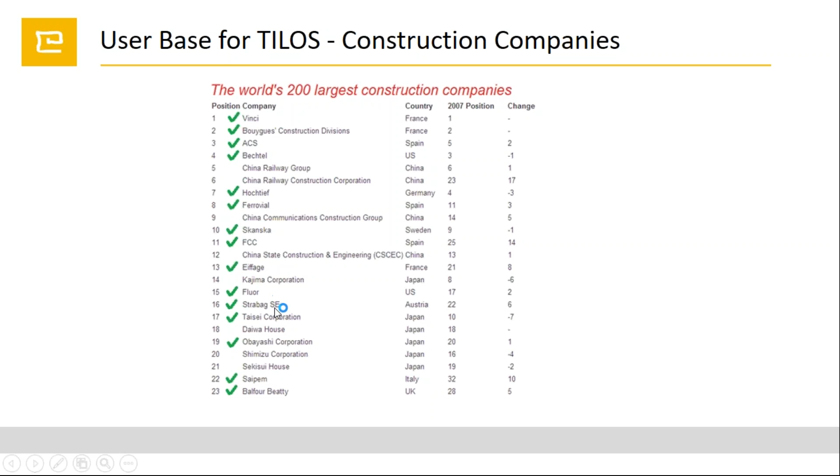So as you can see, TILOS is the market leader in scheduling software in construction. To prove this, here I have the list of the biggest construction companies in the world. These highlighted in green are using TILOS in their projects. Companies like Vinci, ACS, Hochtief, Skanska, Strabag, Obayashi, they all use TILOS.

Let's speak a little about linear project characteristics. So in which industry can we use TILOS? Well, in industries like pipeline, railway projects, highway, tunneling, metro projects, engineering, and transmission.

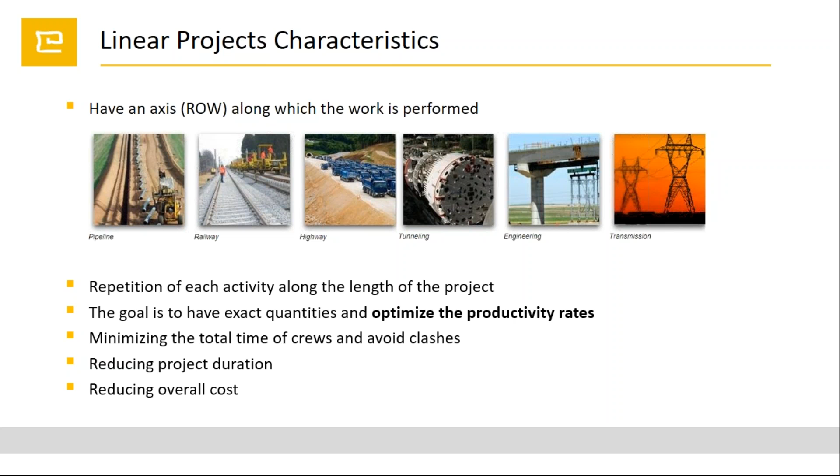Here I have some sample reports which were made in TILOS. Please pay attention that all of these samples are real live projects which were performed and scheduled in TILOS. For example, here we have the highway road project from Norway. Also here we have the transmission line project, pipeline project, high-rise building project, metro tunnel project, and railway project.

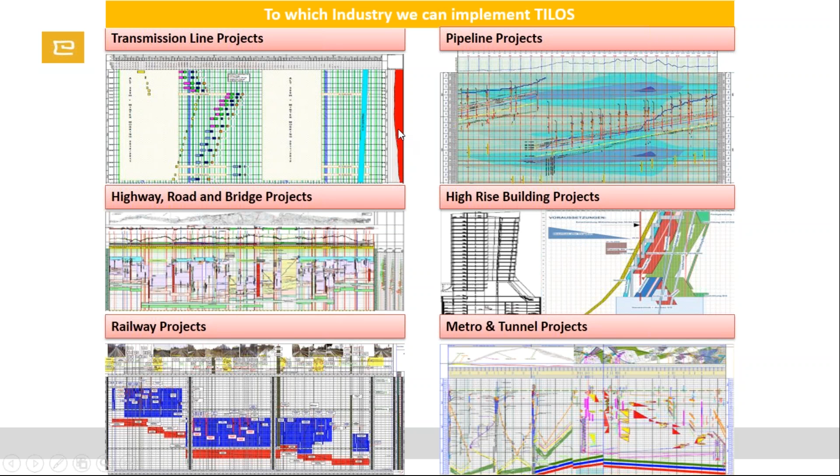So what is the biggest advantage of using TILOS? Well, in my opinion, the biggest advantage of using TILOS is that everything we can see in one big picture. All activities, all the most important information, we can see in one single page.

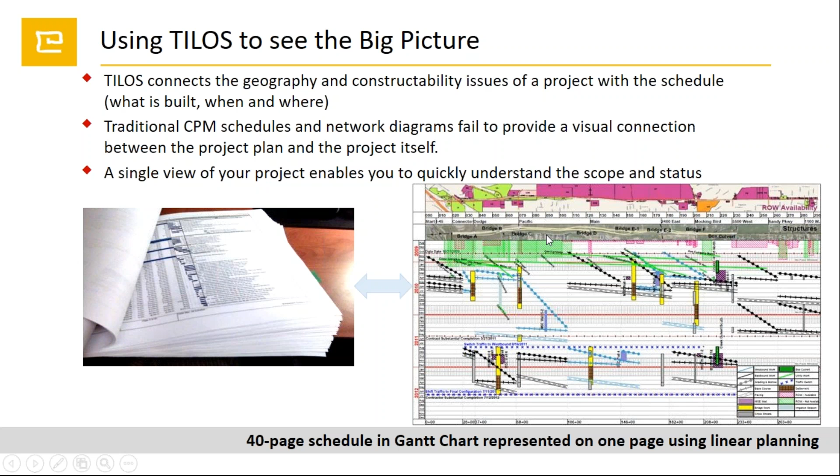For example, here we have this one project. This is the same project, but here we have a 40-page schedule in a traditional Gantt chart on the left side, and on the right side we have the same project but in TILOS. Every activity you can see on one page, and according to the geographical object axis information, you can know exactly when and where any activity takes place.

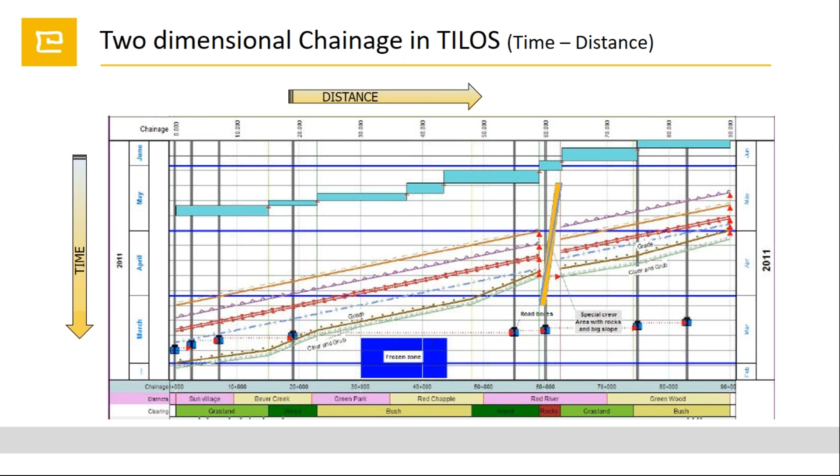TILOS upgrades this to 2 dimensions. So here on the left side we have the vertical axis of time, but horizontally we have another axis which is distance. So here we have our main work area and all activities we can see according to these 2 axes. By the way, the name TILOS is an acronym of the words time, location, solution. Okay, later on I will tell you how you can read this.

Okay, so now let's talk about how exactly TILOS works. Here we have our main work area. This is a simple project which, as you can see, is 4 kilometers, and it's going through 3 months from August to October. So to explain how TILOS works exactly, you must...

I'm using a simple allegory. Try to imagine TILOS as a single page of paper where you can draw anything you need in a project. You can draw any activities from the point you want to the point you need to go. Also, you can divide this page into smaller pages, smaller cells, and in all cells you can put different properties, different stuff. So, for example, you can integrate TILOS with graphical objects. Here we have a simple graphical visualization of the road project.

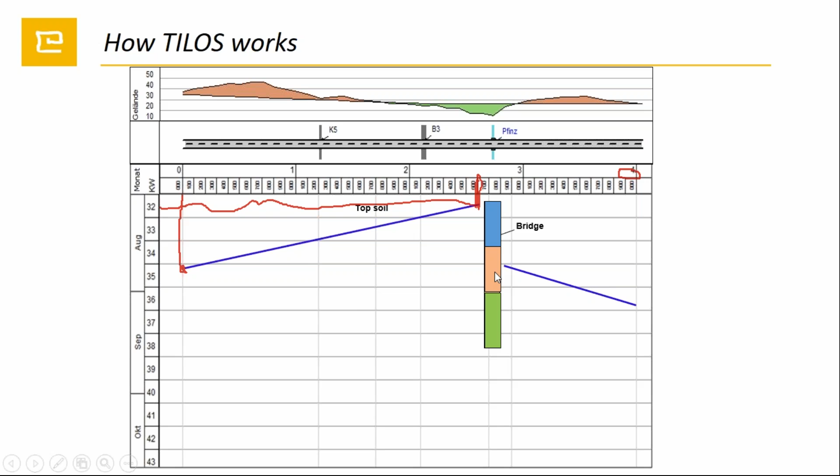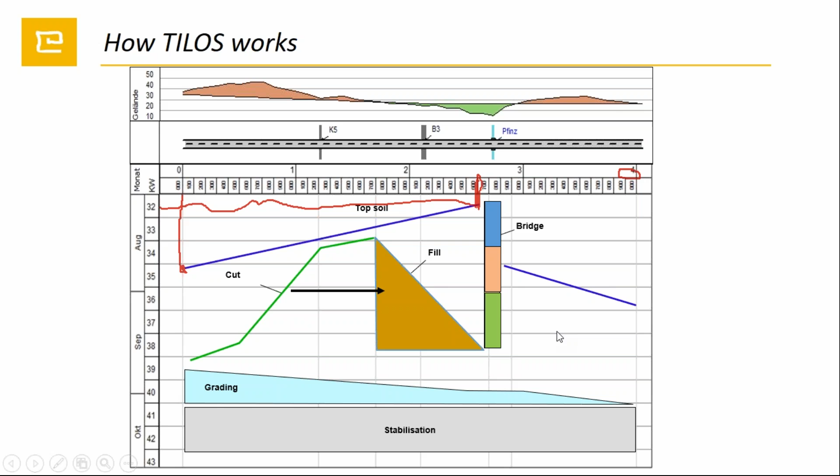As I told you, we can put here some other different shapes - here we have grading, stabilization. Okay, let's move further.

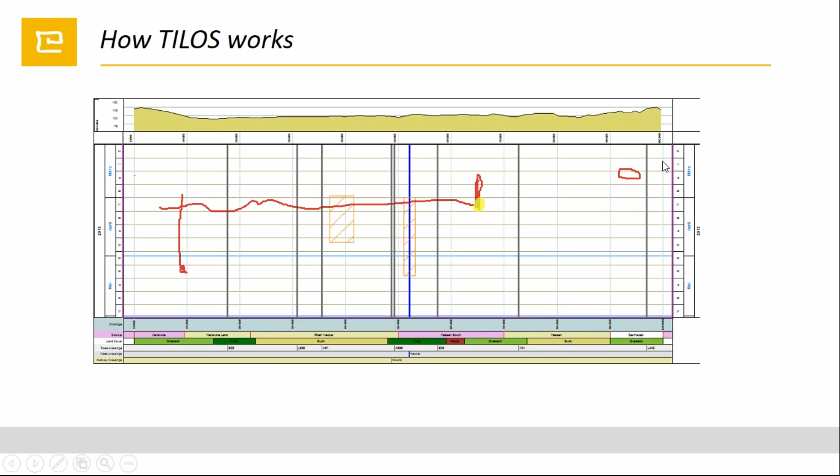Okay, here we have another work area. Up on top we have the elevation profile, and we have our axes, distance and time. But please pay attention to this rectangle in the middle of our work area.

This symbolizes for us that this is a restricted area. What does this mean? It means that in this place, during this time, which is April, we cannot perform any other works - let's say because of environmental reasons. In April we have bird migration here, so we cannot perform any work in this place - it's restricted for us. Okay, let's put here some activity.

Okay, so we have here an activity which we want to start in March, and going down through this line, we can see that we have a clash where we violate our restricted area. So what can we do in this case? Well, for example, we can go to our restricted area and stop in this place before we violate our restricted area.

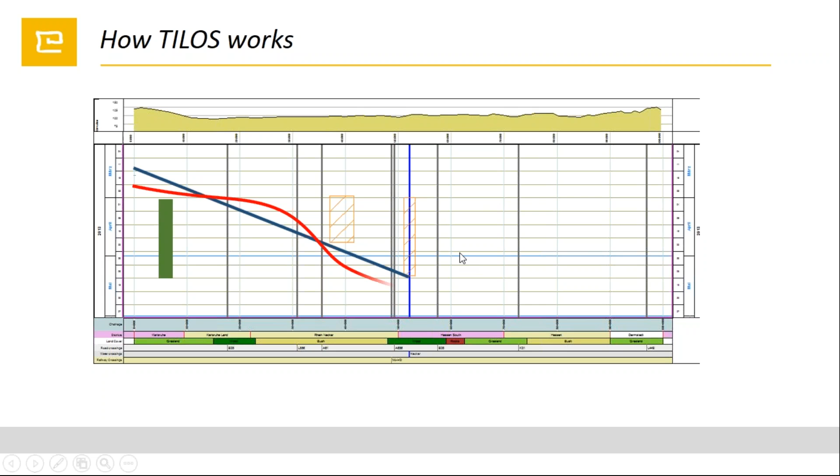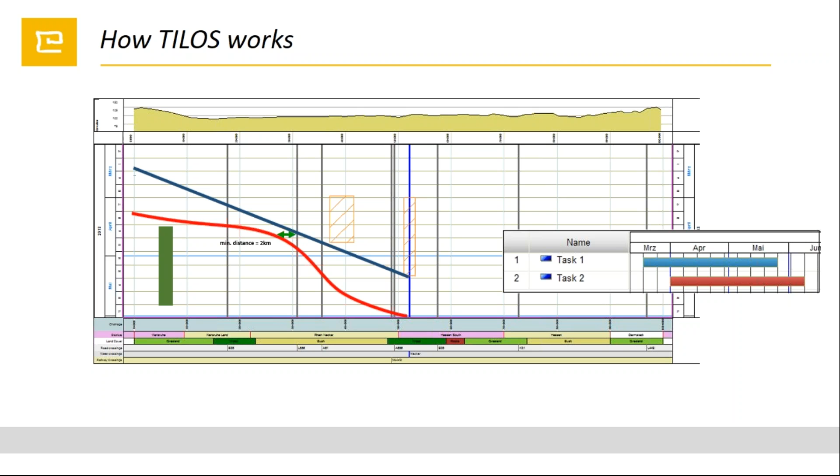So what can we do in this case? Well, we can do the same as last time, moving one task 1 week later, but TILOS also gives us another option. For example, we can set here the lag distance between our crews. Let's say we want our crews to work with a safe distance of 2 kilometers from one to another. In this way, both teams can work without interrupting one another.

Okay, let's speak a little about resource and cost planning. TILOS already has in its library some defined resources which are divided into different categories, like labor resource, machines, materials, etc. And all these resources are ready to use from the TILOS library, and all these resources we can put to our task.

And in TILOS we have permanent resource, consumable resource. You already know what these mean, so I will not take your time to explain this. But some new option which TILOS gives us is the mixed resource. What is the mixed resource?

Well, let's say that you have a subcontractor on your project, which gives you their own equipment with operators and their own fuel. And let's say, because it's a subcontractor, we count this team of men, machines, and material as one resource team. This is the mixed resource. So we simply put a few resources together as one value for us.

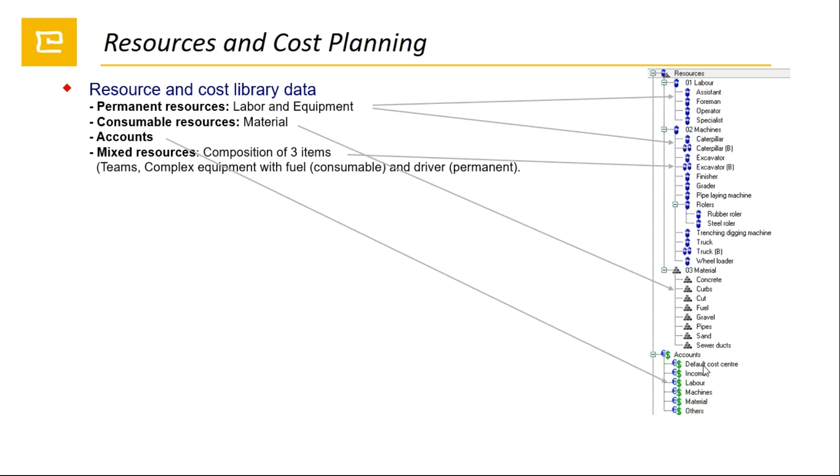Also we have the accounts, which are simply our cost centers. Okay, let's now go to analyzing the resources.

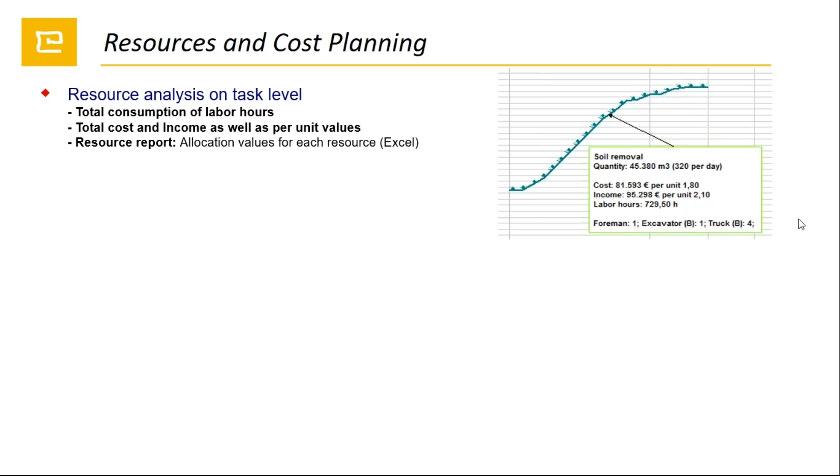You can also show this on the distance axis, so you can see, for example, how much equipment you use in every kilometer, in every section, etc. Also, all this value, all resources, you can visualize as a histogram or diagram. The same with cost and income, you can show this in a diagram, so you can see our values with a graphical bar: total cost, total income, machines, labor, time working, hours working.

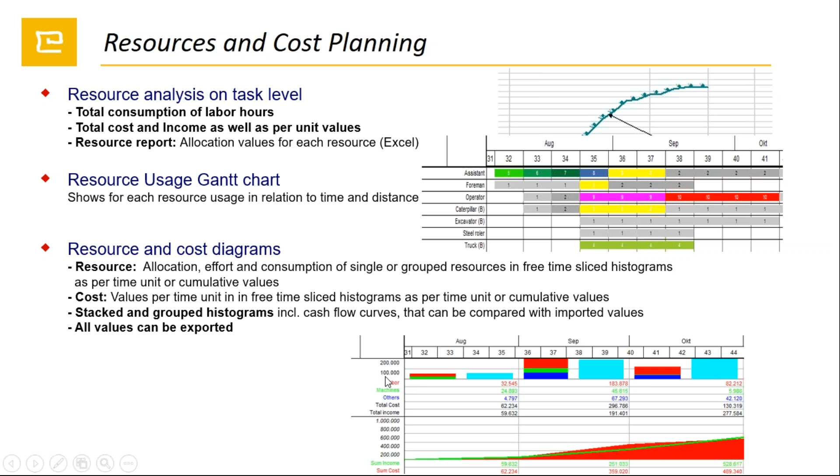Now let's talk a little about putting progress in TILOS and using the baseline. In TILOS we can create and store an unlimited number of baselines, which provide us information on our planned days, labor hours, total cost, income, etc. And we can put progress in TILOS by percent done, or quantity done, or distance to which we complete our activity.

So now, for example, here on the right side we have a simple project with a few activities. This blue horizontal line is our report date. Okay, so now let's put here some progress.

Okay, so we put here our progress. This green line is the completed work. Everything below our report day is work which we need to perform in the future. Let's go further.

We add here some more progress also to our culvert, and we can display our baseline. This gray line is our baseline. So analyzing our actual progress against our baseline, we can exactly see how much we are delayed with our plans.

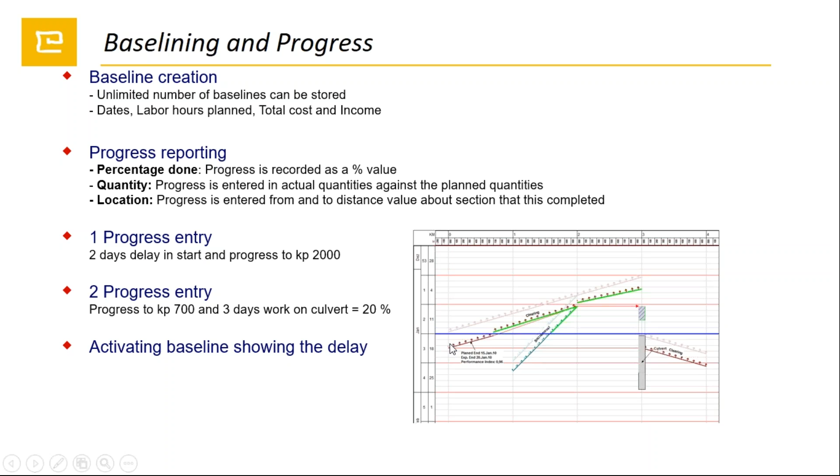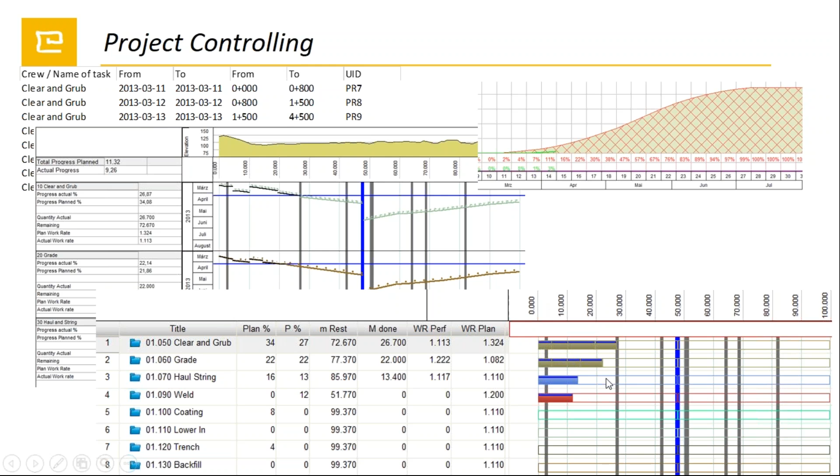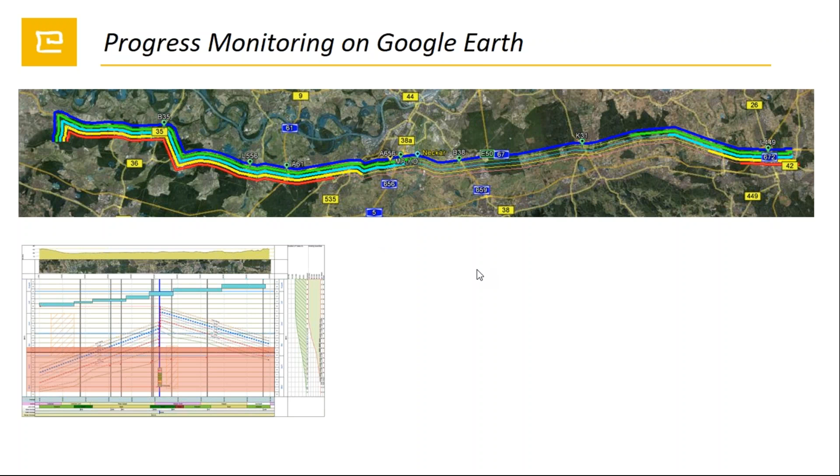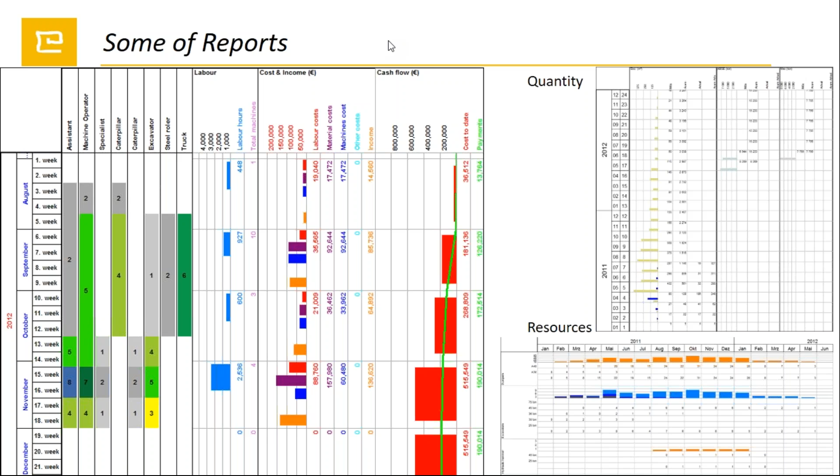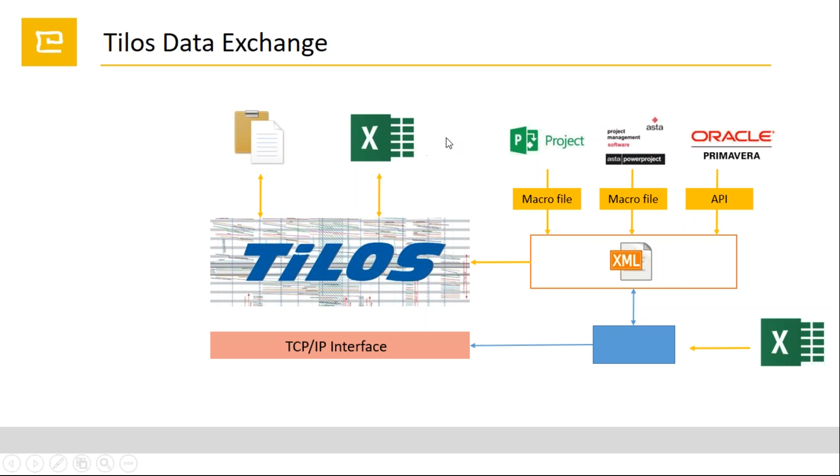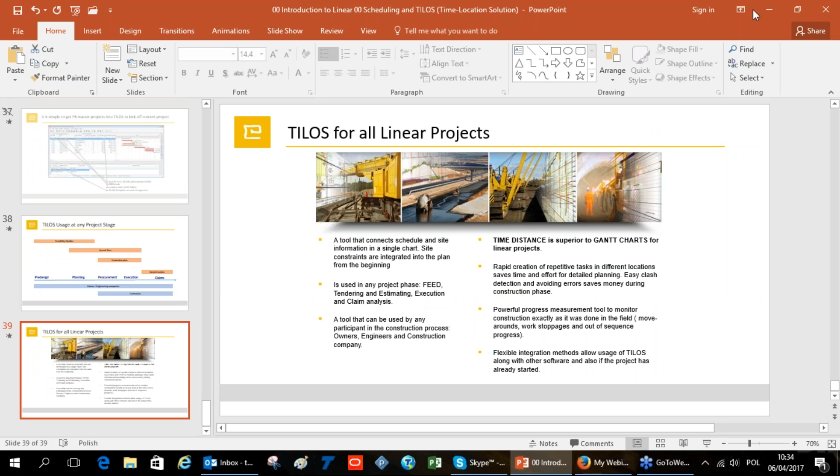So this is everything about the presentation. Now I want to show you a real life example of using TILOS. I prepared some projects on which we use TILOS.

Okay, so for the beginning, here we have the Western High-Speed Diameter project from Russia. Let me make the screen a little bigger. Okay.

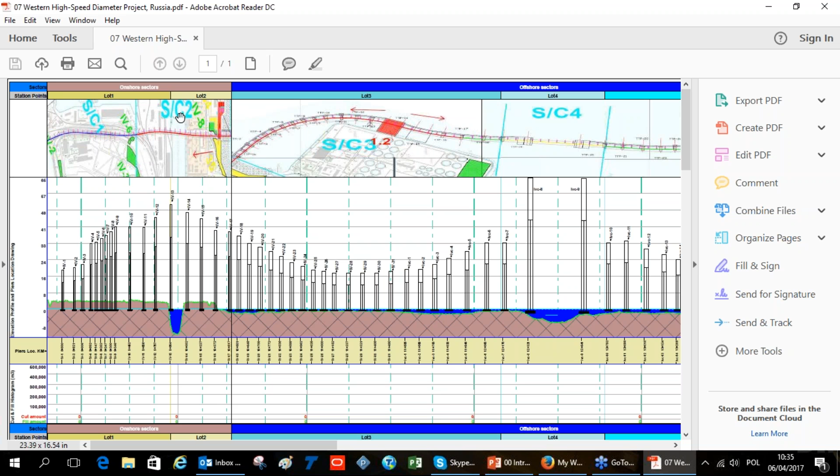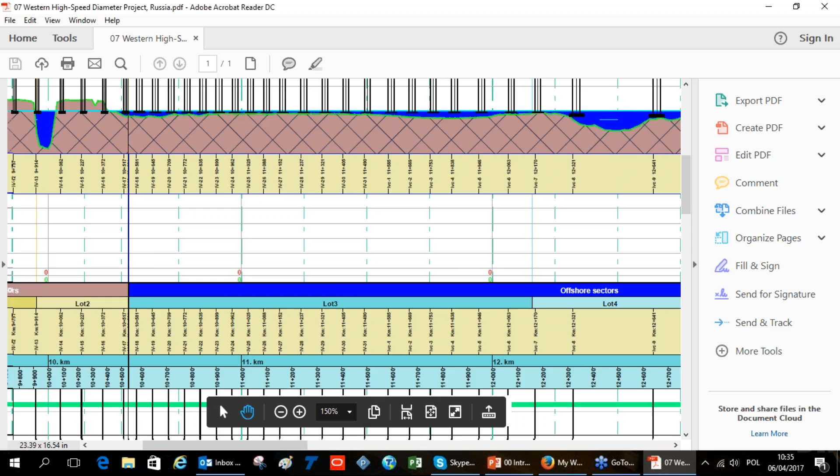So here you can see some graphical information. Here we have divided the project by sector, station point. Here we have some elevation - everything bigger. Elevation profile with piers location drawing. Also, we have here the cut and fill histogram, some kilometrage. Here we have design work until this moment, some station work.

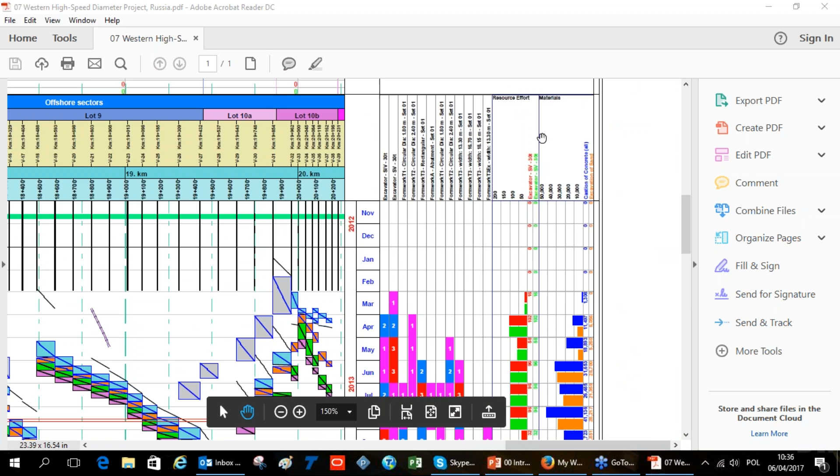Also on the right side we have reports. Here we have equipment, some resource effort materials.

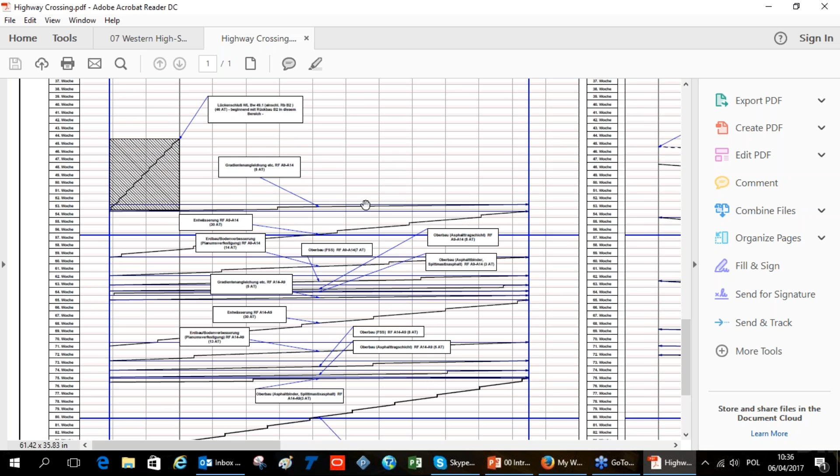Now I will show you the project of the highway crossing. This is a project from Germany. So as you can see, this is quite different from the previous one - it has fewer cosmetic options. This was the wish of the clients, for it to look like this. Our activity has a name, using a text field.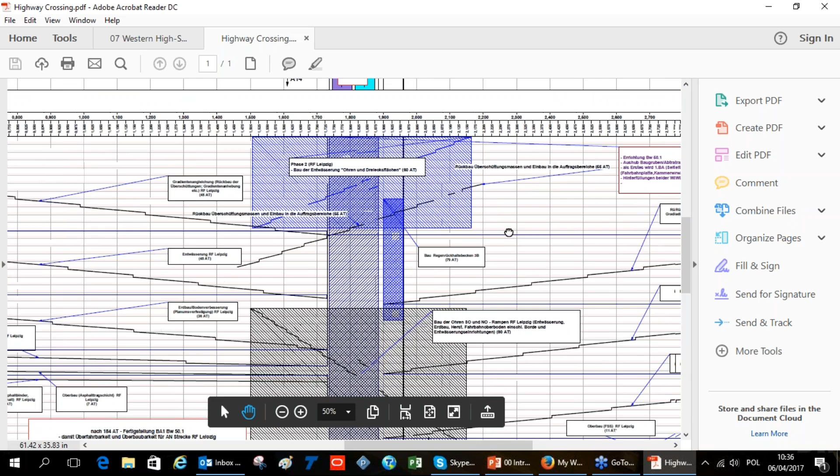And as the last, I will show you the highway project from Norway. As you can already see, it's much more complicated than the previous one.

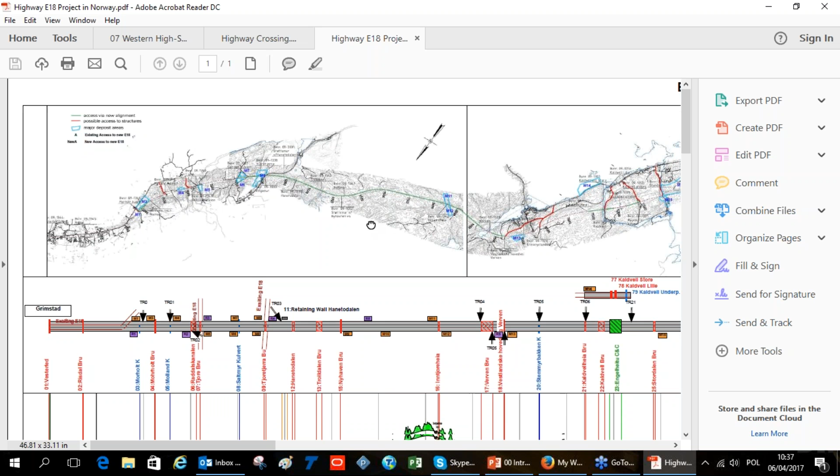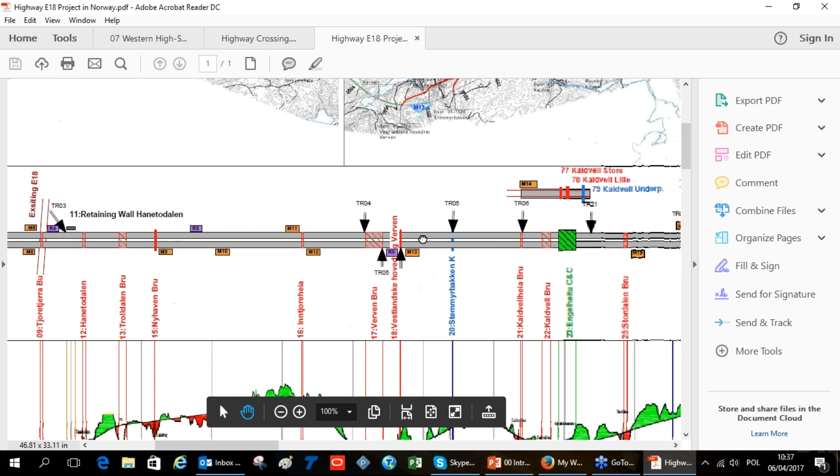On the top we have the map with the important location points, which was implemented in TILOS. Below we have the graphical visualization of our highway, and please pay attention that all of this

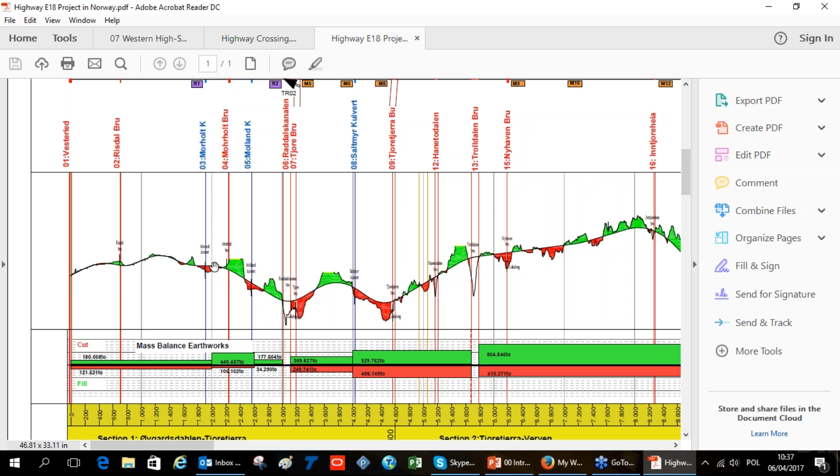visualization is made completely in TILOS by using only the TILOS graphical library. Below we have our cut and fill with our road level and cut and fill soil. Also here we have

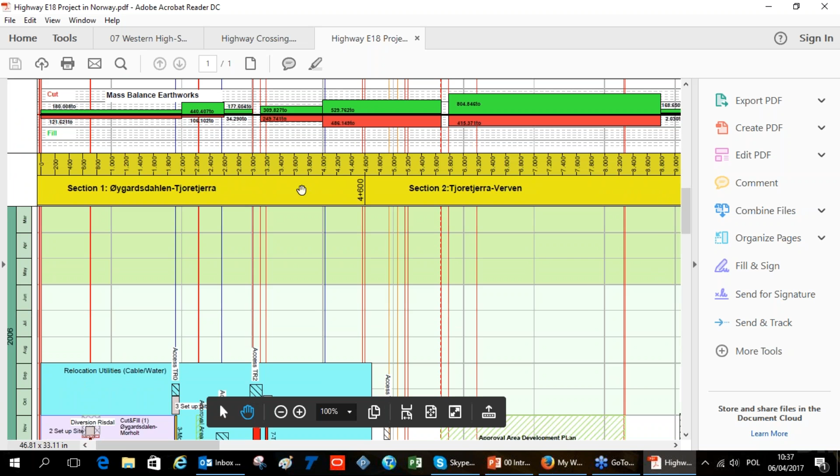our mass balance work. Here you can see that the project is divided by section. Here we have activities.

It could look complicated, but later when we work more on TILOS and you learn to read this diagram, it will not be very complicated.

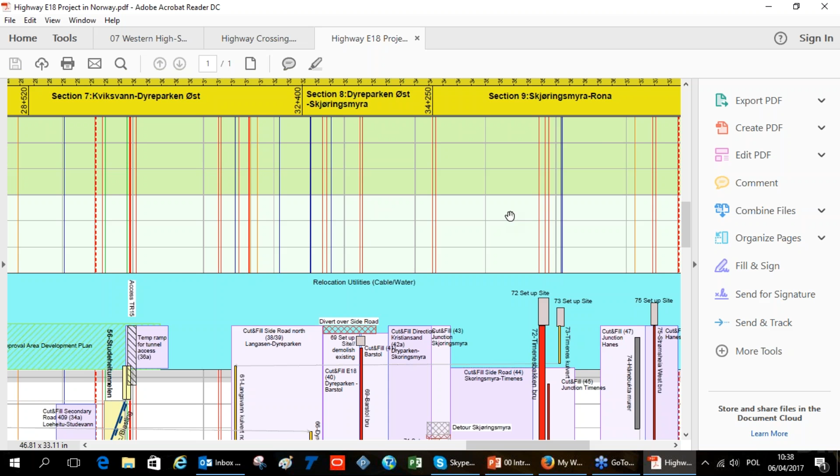Also, as I told you, the project is divided into sections, and you can show each section singularly. Not only the whole project, but you can see the view of a single section. I will later show you how you can change this.

And also here we have some reports: earthworks, tunnel sidewall elements, tunnel roof elements.

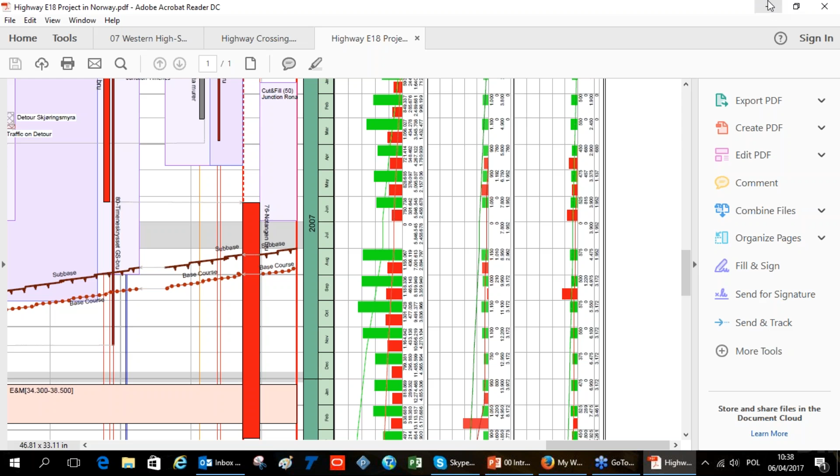So now let me go to a live demonstration. I will show you some options for how we can create a new project in TILOS.

So this is the first site which we will see in TILOS. I'm clicking File, clicking on New.

Here we can choose the templates on which we will work. Templates are very useful for us, which help us save time, because all templates already have a predefined library

with objects, with task templates, etc. All these templates we can adjust to our needs. We can change this, or we can create completely new templates from scratch. For now, I will choose the general template.

Okay, here we have our settings for our project. I will call this the webinar project.

So we can choose the distance unit, start and end distance. I will make this a little smaller. Let's say that our project will have 4 kilometers, 4,000 meters.

Here we can choose start and end date. Also, the base time unit by default is the 8-hour working day. Also, we can choose calendars. All calendars we can change, or we can create a completely new calendar.

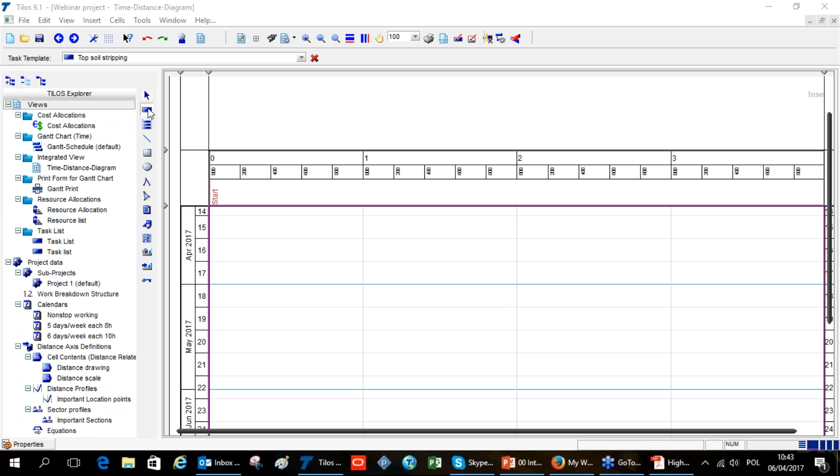And here from the quick menu, we can choose which template we want to use. For example, I want to use topsoil stripping.

Also, all of this I can take from the TILOS library. Here I have task library and task templates. But okay, I will now use this, I will add topsoil stripping to our activity.

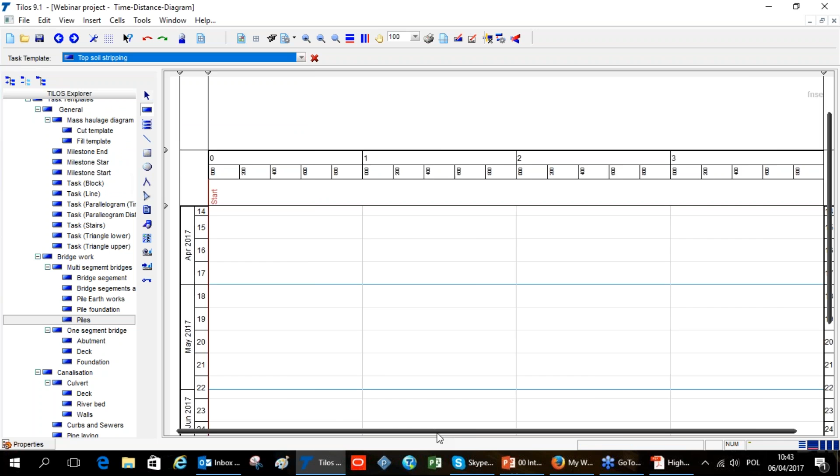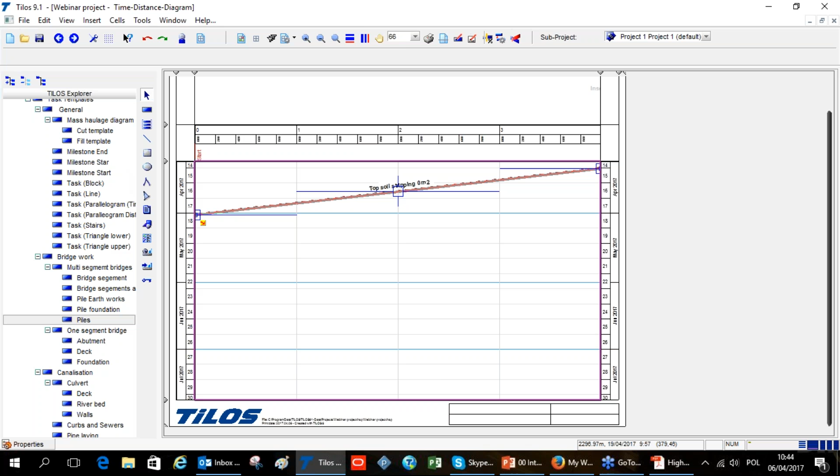Let's say that I want to start our topsoil from the end of our project, and I will make it a little bigger for a better view. So let's say I want to start from the end, and connect this to the beginning, to the 0 point. So I simply add this, this is the simple way to add the task by using the topsoil, by using our quick access menu.

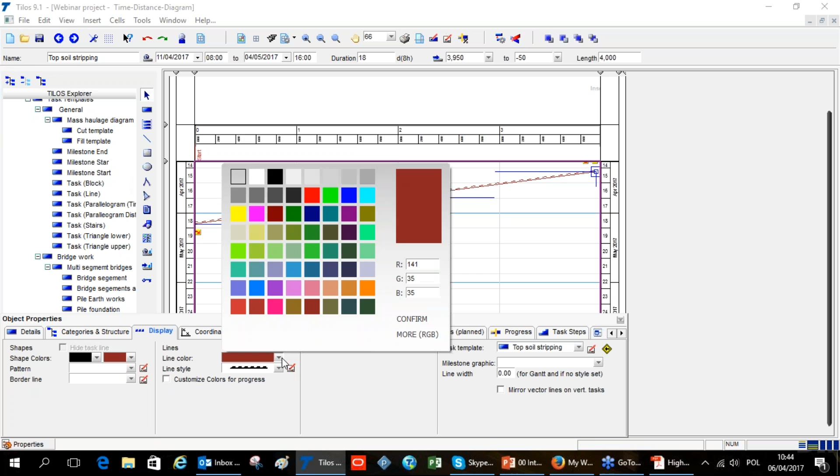Also, when we add activities, we can move this, we can prolong or shorten this activity, we can change coordinates of our activity. Also, we can change the option of visualization by simply going to display. We can change the shape of our topsoiling, we can change the color of this shape as well.

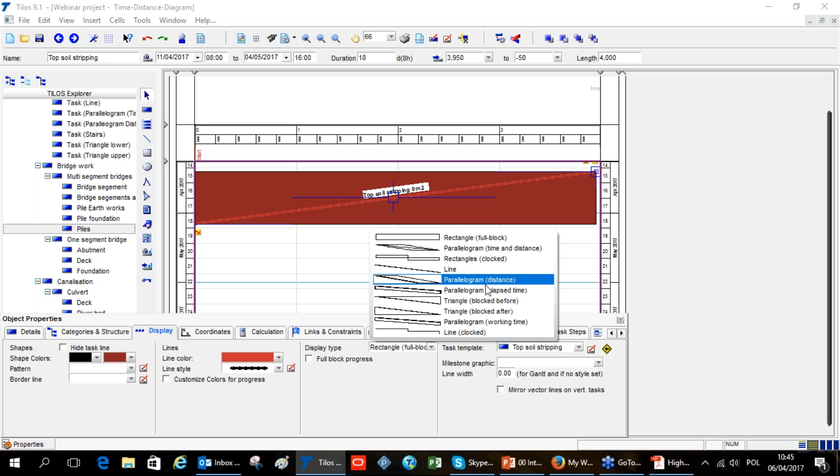Also we can choose the display types. For now it's the line, but if you want, we can show this as a rectangle or another shape. We have full control of visualization of our tasks, and we can show this in very different ways.

Okay, so I'm back to the lines. As I told you earlier, TILOS is very well integrated with graphical options. So let's say here on the top I want to put some simple visualization of my project. To do this, I must go to the quick access bar and choose insert graphic object, then simply select the area where I want to put the graphic object. I can put a graphic from the library.

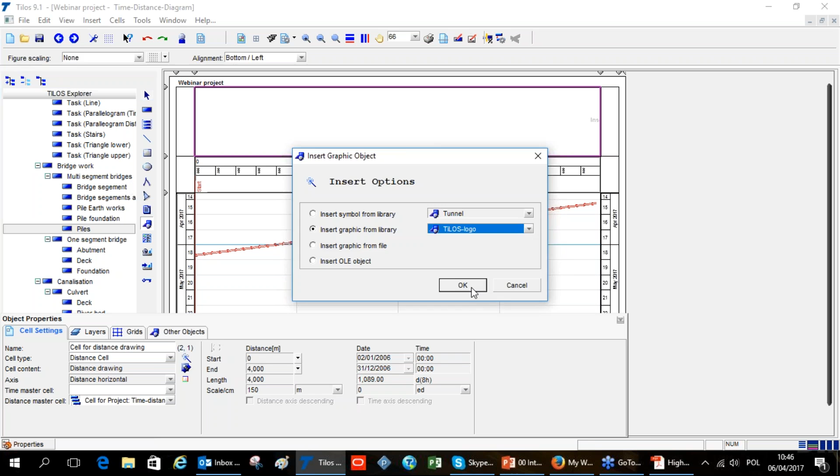This is a graphic from the library. You can use symbols like, for example, the TILOS logo. I could put this here, but in this case I don't want to. Also, I can put a graphic object from a file. I will go to insert graphic from file and click OK.

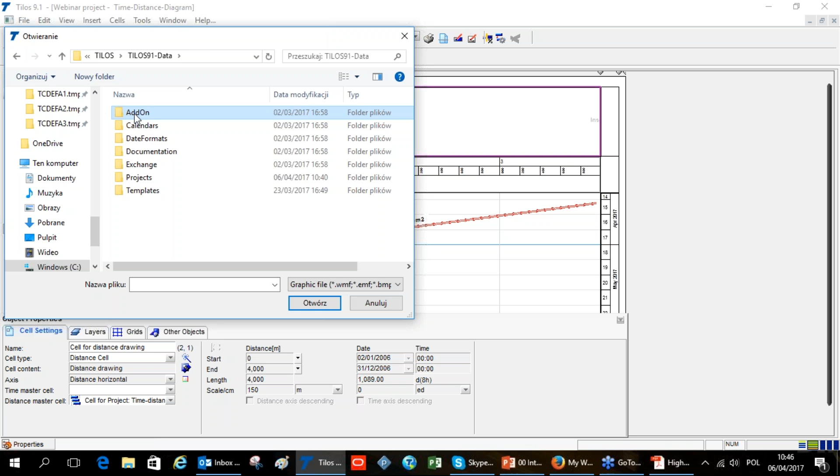Here I already have a roadmap prepared earlier. I will use this. Click open. And now we put our simple roadmap into TILOS.

To do this, I must click on my roadmap, go to scaling and choose both axes. Here I have the option adjust position. I click this, close, and select the area between the points which I want to adjust to my distance axis. So this time it will be my first crossing and the other crossing.

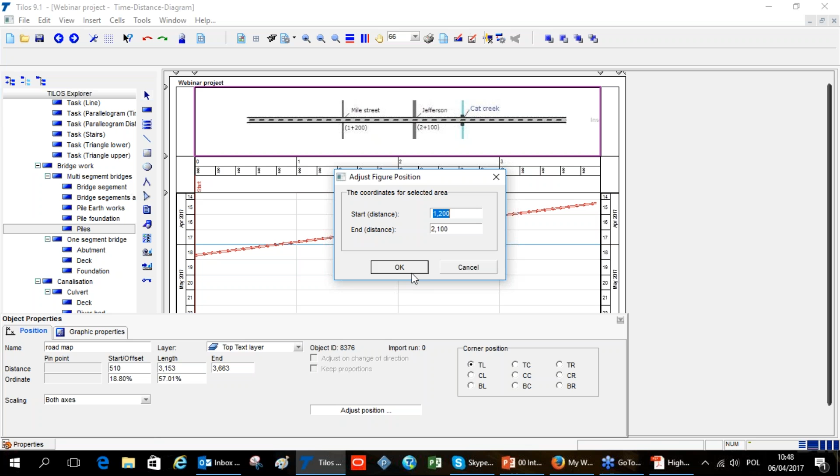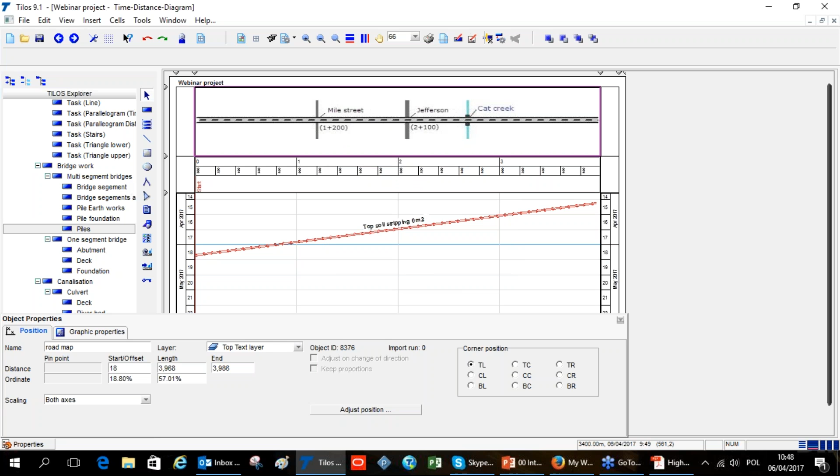Okay, so now I know that my first crossing needs to be 1200 meters, so I type this value, and my other crossing needs to be at 2100 meters. I type these two values and click OK. So now, as you can see, the picture was adjusted to our distance axis.

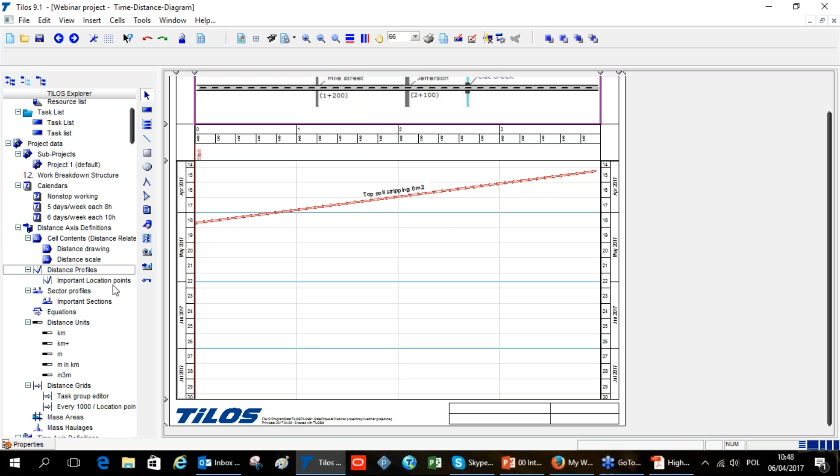This value I can also show as a grid on my main work area. I will show you how to add the grid with important locations. Here in TILOS Explorer I have the distance profile and already created important location points. I just double click on this, and here I can add a new important location. I have started at the 0 point.

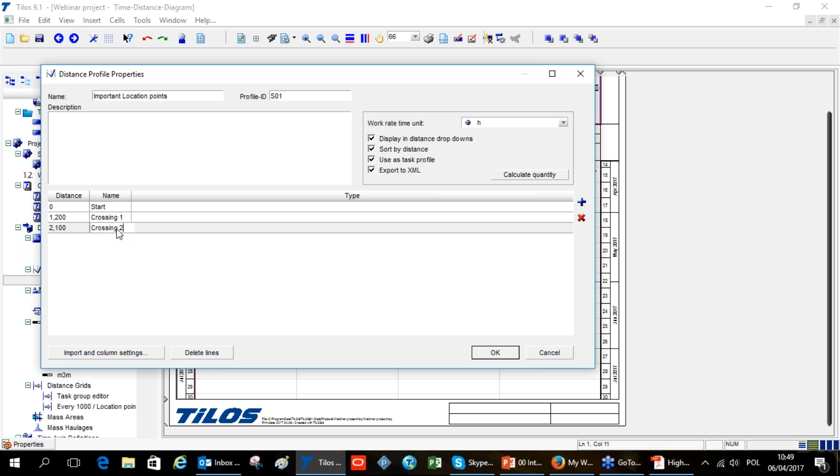Now I will add my first crossing. I know that this is at 1200 meters, so I type this value. This will be crossing 1. Another crossing at 2100, this will be crossing 2. And when we adjust, here you can see our river will be, let's say, at 2700.

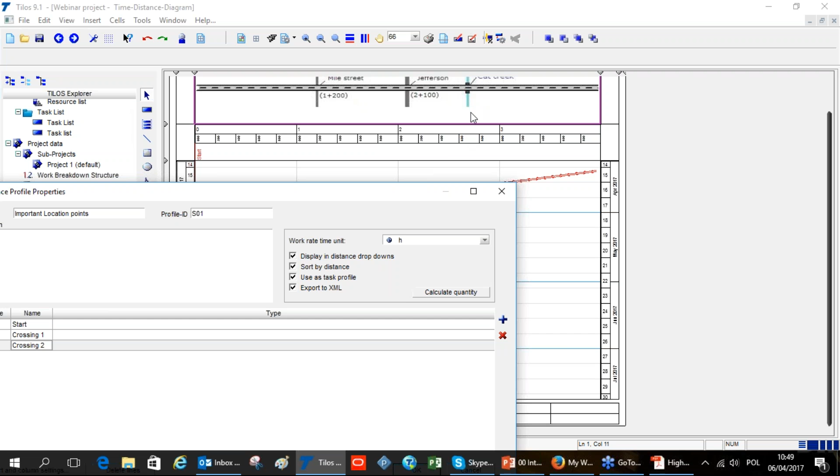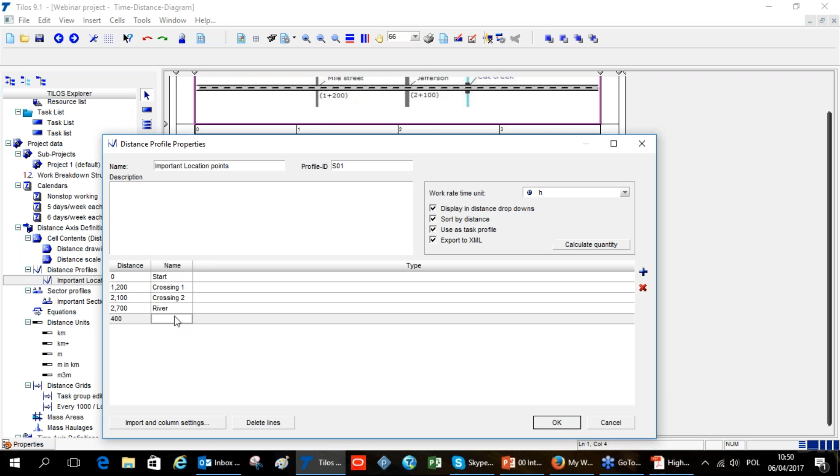You can simply watch the picture and see at which meters our river crossing is, even without any data written. So I will add 2700, it will be our river, and our end distance will be at 4000 meters, that will be our end. I'm clicking OK. So now, as you can see, we have the axis with important location points.

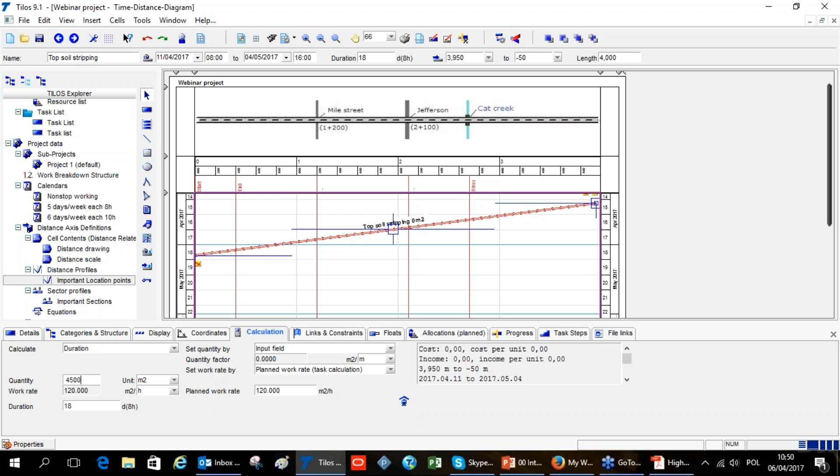Now I will go back to our topsoil stripping, just clicking on this, and go to properties, then to calculation. Here, for now, we have the quantity 0 square meters, but I want to put some value here. Let's say we have 45,000 square meters. When we put in this value, our duration was automatically changed. Now it takes us 47 days.

Why is that? Because in calculation options you can see we have the option calculate duration. When we select this, we cannot change duration, but we can change quantity and work rate, and our duration will be calculated from those.

For example, when I change the work rate, I will double it, and my duration is changing. Also, I can choose quantity so it cannot be changed and will instead be calculated from duration and work rate, and the same goes for the work rate.

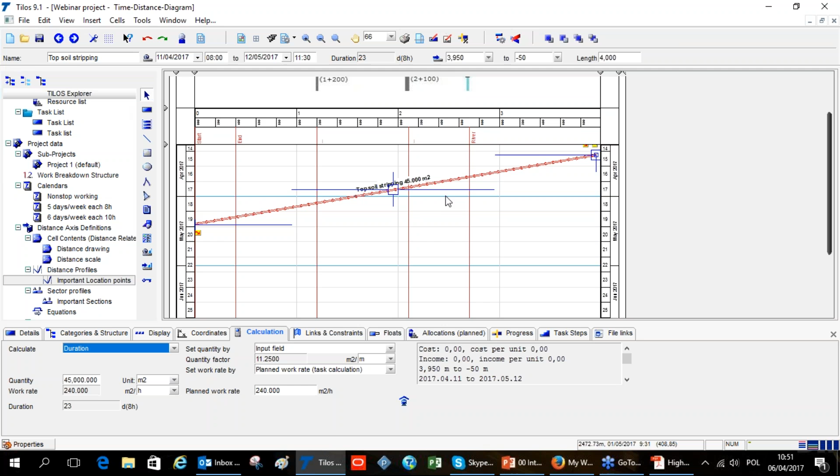As you can see, I am putting topsoil on the whole distance, but here I have this graphic object river, so let's say I will split my task into two parts, one performed on one side of the river and one on the other. I'll right click on this, go to task creation, and split task, splitting by distance.

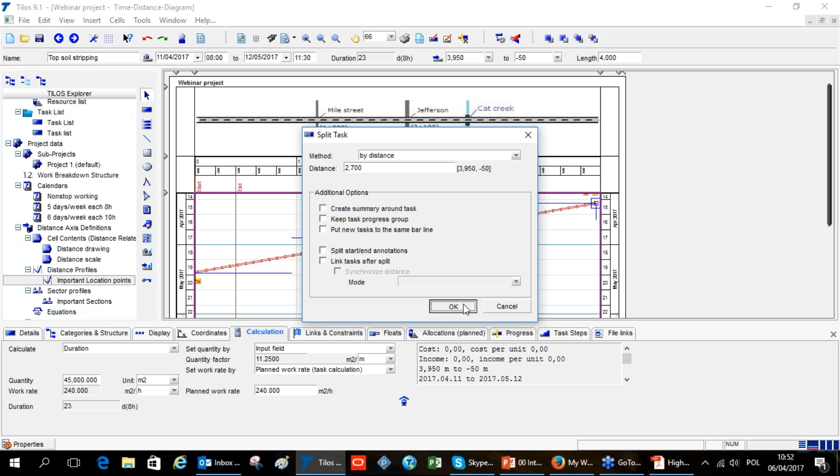I know that my river is at 2700, so I type this and click OK. As you can see, I created two different activities, and the quantity was automatically divided between them.

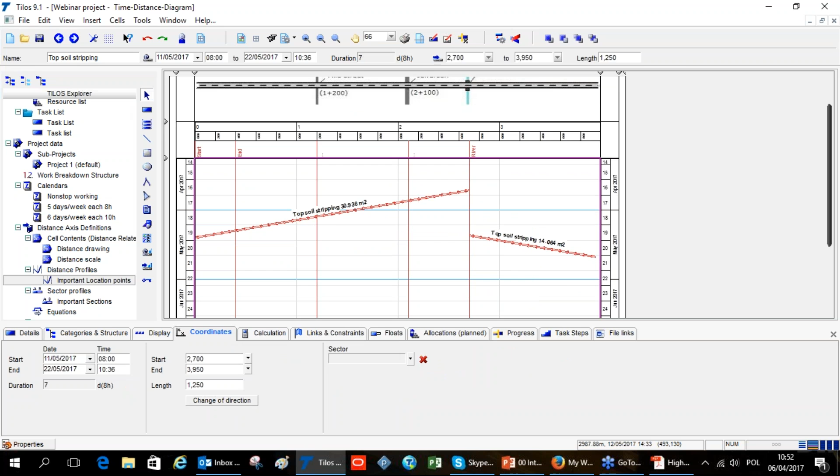So here, for example, I will change coordinates. Also, I can put a link between these tasks. Let's say when my first topsoil ends, the other one can start. To put the link, I select this arrow and go to the beginning of my other topsoil stripping task, creating a link of type finish-to-start.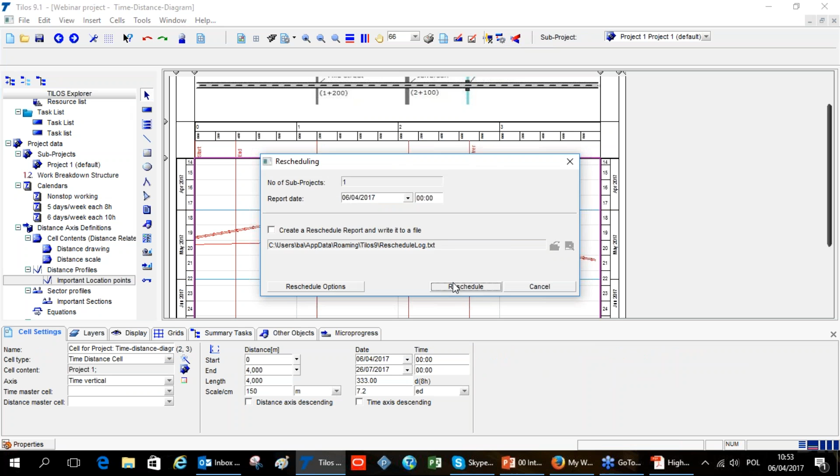I will reschedule using this button or F9 to reschedule. I can, for example, give here some lag, let's say 2 days, and I will schedule this one more time. As you can see, everything automatically changes.

Also, I'm clicking by the link. I can change the type of the link time. Now it's finish-start, but let's say it will be start-finish. So when this is start, this must be finished. So when I click reschedule, you can see that everything automatically changes. So it gives a very good option for rescheduling our project.

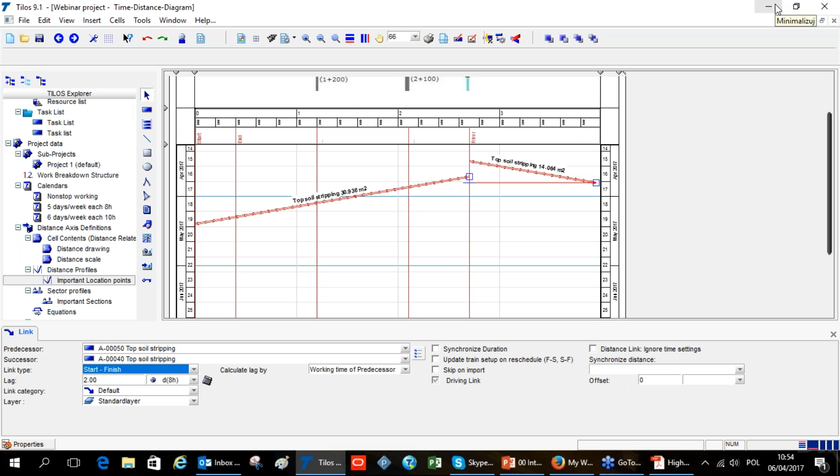Okay, now I will show you how we can... I will minimize this project, and here I have another simple sample road project. I will open this now.

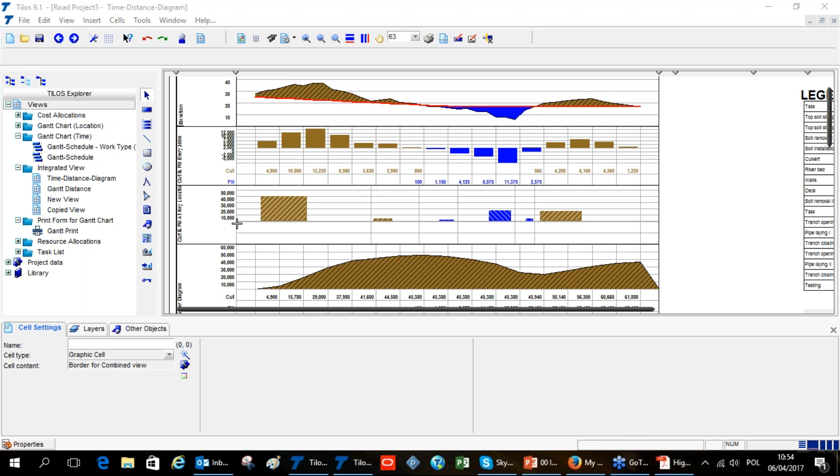Okay, here I have a simple road project with elevation. Here I have elevation profile, some diagram. This is cut and fill according to 500 meters. Here I have cut and fill according to the important location point. I have a Bruckner diagram. This is the same roadmap as the previous one, but it was all created in TILOS using the TILOS library.

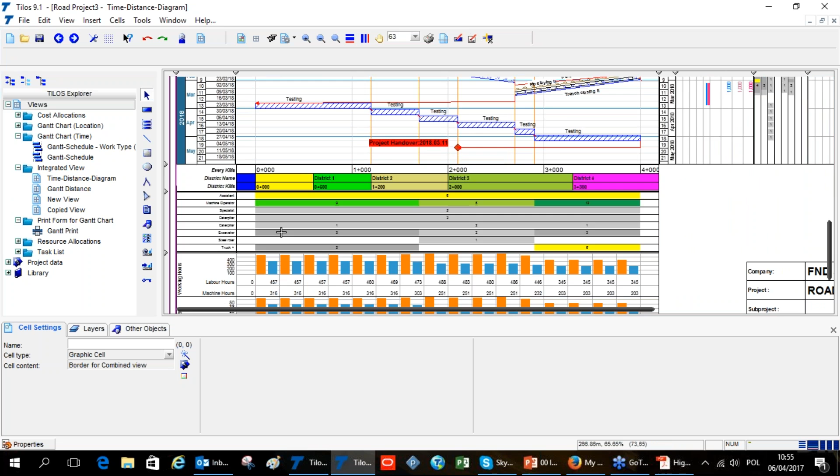Here I have some activities. And here on the right side I have reports, quantities, working hours, working day, cash flow, and also I have reports, resources on the distance axis. Here I have an array object, and I also put the legend here to show my activities, which is one.

Okay, so this is our main view, this is the time distance view. I will also show you how we can change this view in TILOS, simply by going to the view in TILOS Explorer. For example, I will go to the Gantt chart schedule.

So if you want to see, this is all the same activities like the previous one, only shown in the Gantt chart. So you can see exactly the same activities if you use the traditional view. We can also add some histogram to our Gantt chart. This is the Gantt chart through the time.

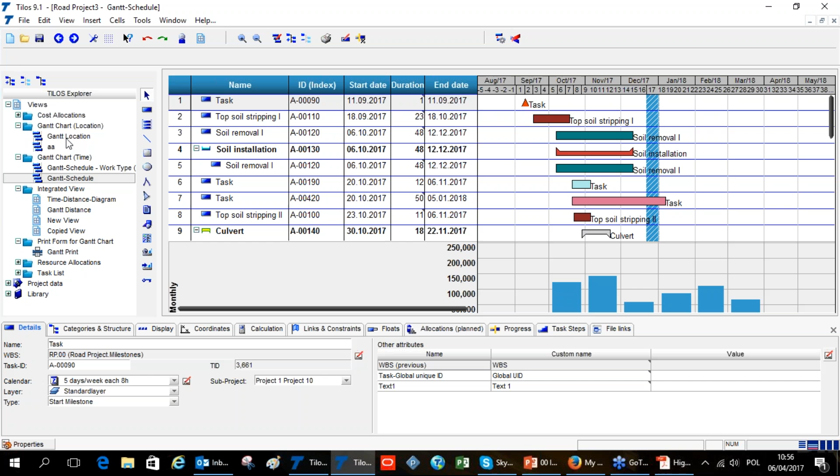Also we have Gantt location. As you can see, this is also the activities, but according to the distance. Also here, all activities are grouped in different groupings like canal works, civil works, controlling, etc. And also we have the option to show our activities as a task list, so here we have all activities, all values.

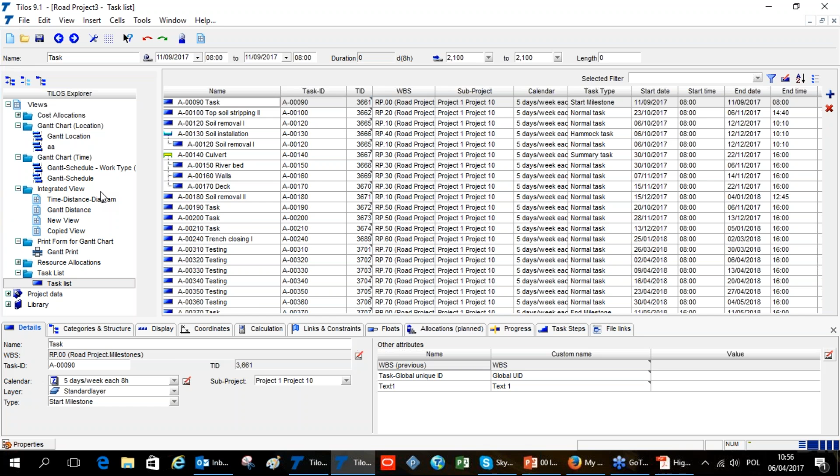Also, if you want to go back to our main view, just simply we need to click time distance diagram.

Okay, that will be everything which I prepared for today's webinar. So if you have any question according to what I showed, please don't be afraid, I will try to answer. So just type your question if you have some.

Sorry about this, about the breaking voice. Maybe it's something with my microphone.

Okay, so I cannot see any question according to our webinar, so one moment.

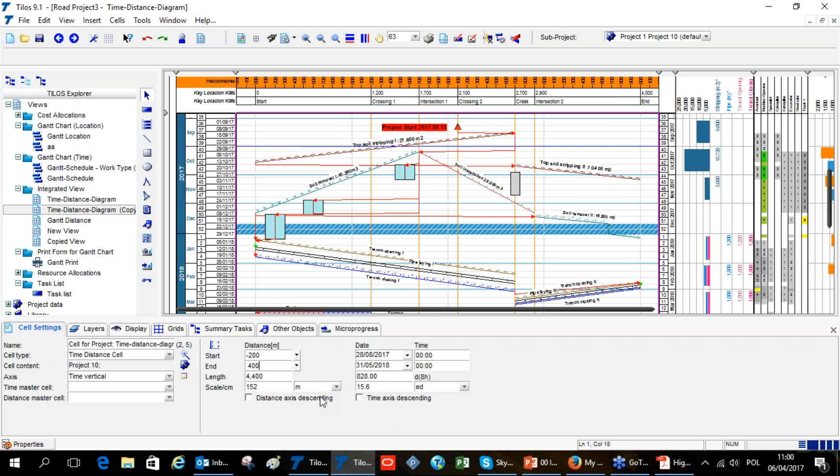As you can see, you can normally work on a small project which only has 4,400 meters. There is no difference in how big your project is, you can work on any project with TILOS.